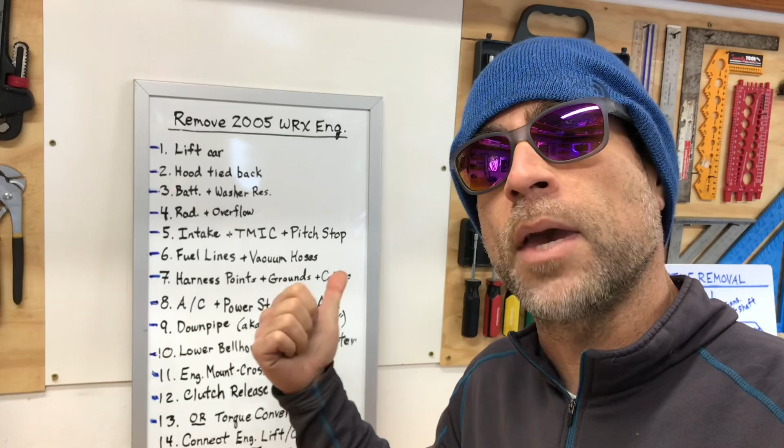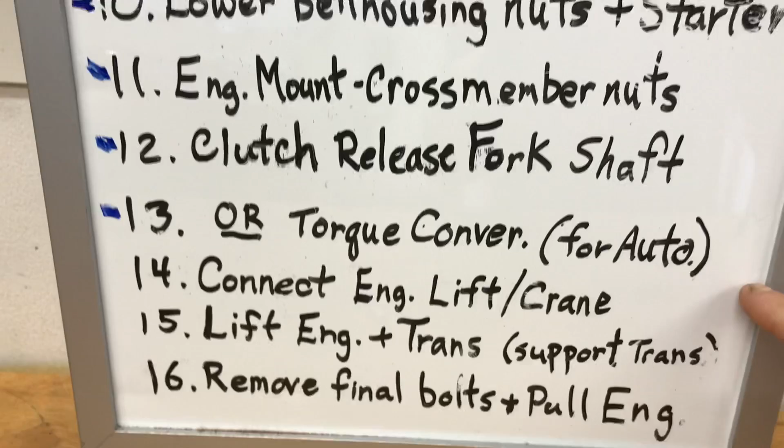This video is actually part of a build series where I'm removing a 2005 WRX engine and tranny from my 1998 two-door coupe. This whiteboard behind me has the 16 steps that I've been going through as I make these videos on this build series. Here's a close-up view of the list, and I put a hash mark by each step we've completed. As you can see, we've worked our way down the list, and we're all the way down here on the final steps. Step 14, 15, and 16: connecting the engine lift and crane, lifting the engine and transmission and supporting the transmission, and then remove the final bolt and remove the engine.

There's actually one bolt. I'll erase that right now. Let me get that erased, boom. And I'm gonna do all three of those steps in this video. So this video will actually be the last video in this build series where I'm removing this engine from that

1998 Impreza two-door coupe. And the steps that I've walked through in these videos where I'm removing this 2005 WRX engine will actually apply to virtually any Subaru engine that you're gonna remove from your Subaru. Doesn't matter if it's naturally aspirated or turbocharged, 4-cylinder or 6-cylinder. I'll bet that 95% of these steps will actually apply to you and your engine combination as well. So I hope you found this build series valuable, and check out some of those older videos if you want to see some of those earlier steps.

Okay, so let's head out to the car and let's take a look at the tools I'll be using to pull this engine. Alright, here's the engine hoist that I use. It's a Pittsburgh model. You basically can get it at any Harbor Freight store. I'll walk you guys through how I set it up.

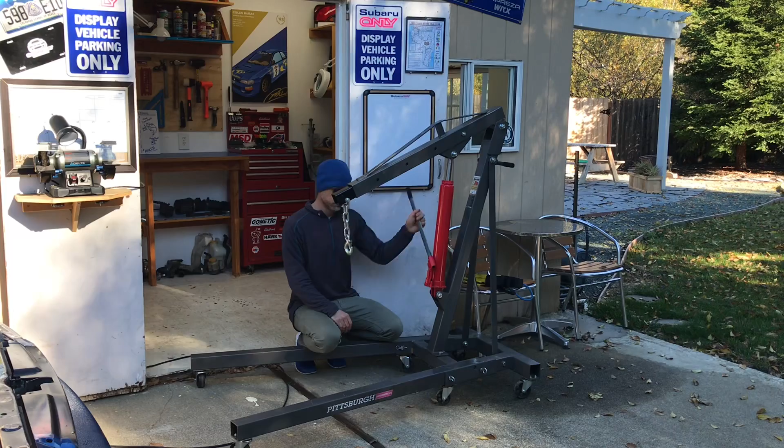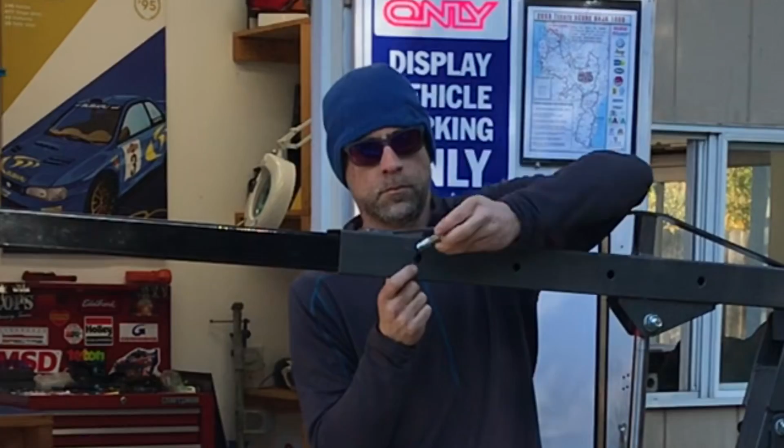It definitely helped to get one of these engine leveling blocks. They have a little crank on one side. The way these suckers work is as you crank it, it actually moves that mounting point along that block. So definitely get yourself one of these leveling blocks. It makes it a hell of a lot easier to pull any engine.

I actually get 4 of these suckers to connect my chains to that leveling block. These little suckers are rated for 2,200 pounds each, and they have a little screwing lock mechanism that you can lock down so you make sure the sucker's not going to come off.

Okay, the next thing are the engine chains you're going to use. Most engine hoist chains that you get are going to come with these little right angle brackets. And these work great if you can connect directly to your engine block, or in some cases to your intake manifold. I've done both, and I'll walk you guys through that in a little bit more detail later in the video. But for now, I'm just going to walk you through how I connect them to my leveling block.

Now, in addition to these engine hoist chains, I actually use these heavy duty carabiners. These suckers are awesome. They're made of stainless steel. They have spring-loaded little latches right there, and they're rated for 800 pounds each. So each one of these could lift an entire engine. And we actually use these guys to connect to our lift points on the engine.

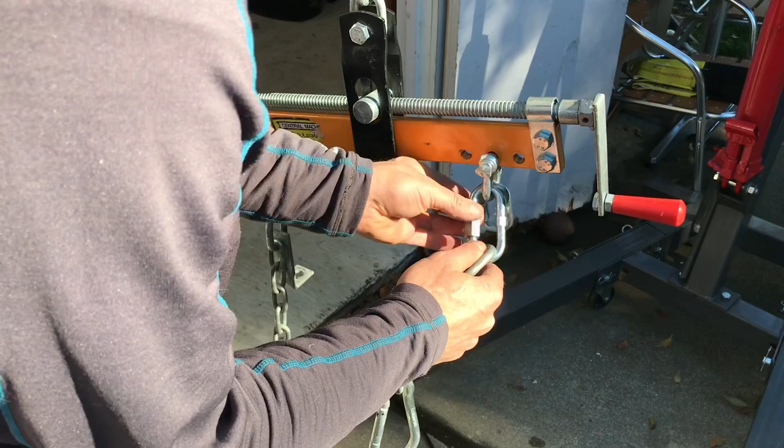So for now, I'll put these on the chain, and we'll throw these suckers on the leveling block on the engine hoist until we're ready to connect it to the engine. Then you can go ahead and screw that sucker down and lock it in place. You can see how quick and easy it's going to be to connect this to the engine once we're all set up. Okay guys, that's my whole engine hoist setup. It's a quick and easy setup.

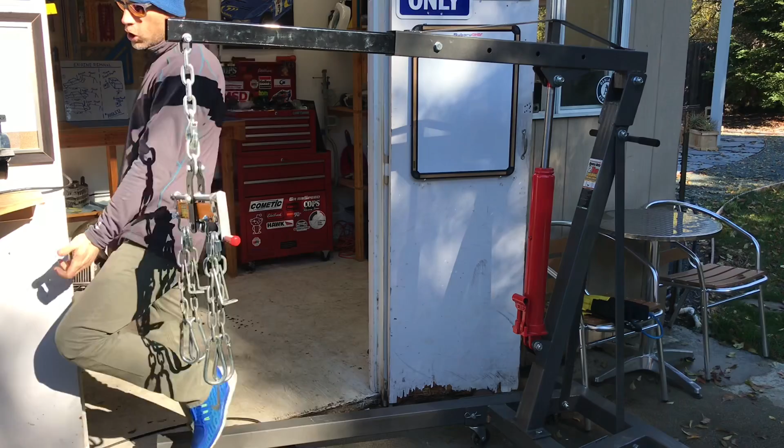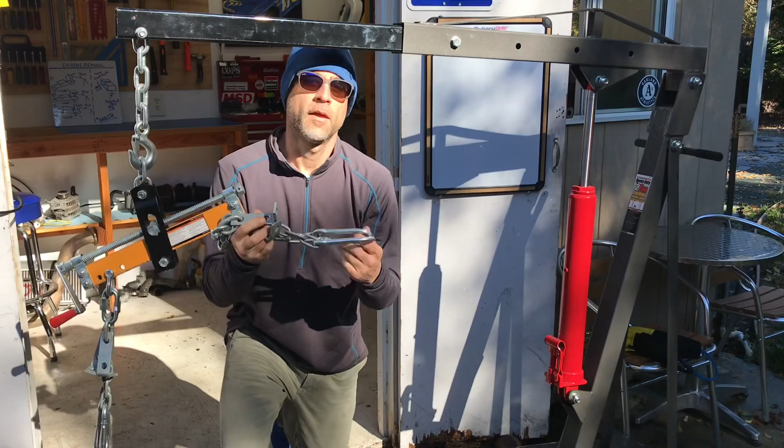Okay, so that's the whole engine hoist or engine crane setup. You got your hoist. Make sure you extend that top arm out to the furthest point. That makes it a lot easier. You got your leveling block. That definitely makes it a lot easier because you're gonna need to tilt that sucker a little bit as you're pulling the engine out. Then you got your chains, and of course I'm using these quick release heavy duty carabiners.

You can use any hardware to connect to that engine, but just make sure it's rated for the weight of these engines. These engines are typically in the 400 to 500 pound range. And if you're gonna pull your engine and your tranny, add a few hundred more pounds to that estimate. Okay, so let's move on to connecting this sucker to the engine.

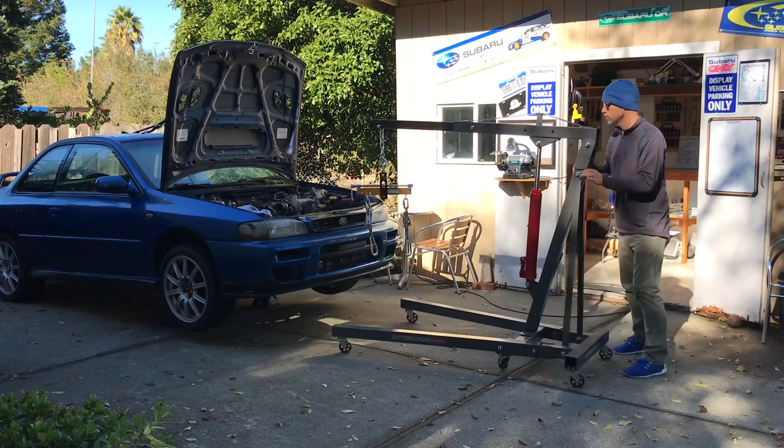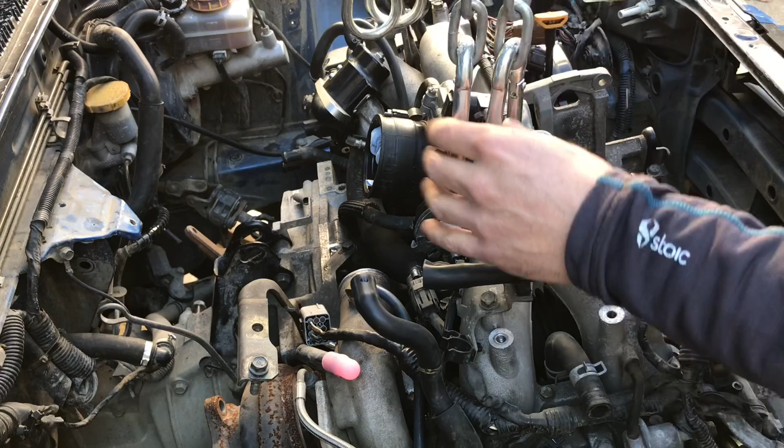Okay, we're over the engine bay, and we're getting ready to set this chain up. Now where are our engine mounting points? The two mounting points are this bracket in the back of the engine, right here, that bolts up right next to the bell housing. And the second mounting point is gonna be that AC compressor bracket. That's that heavy duty cast bracket, and it's got that hole right here that's gonna be perfect to lift this engine from.

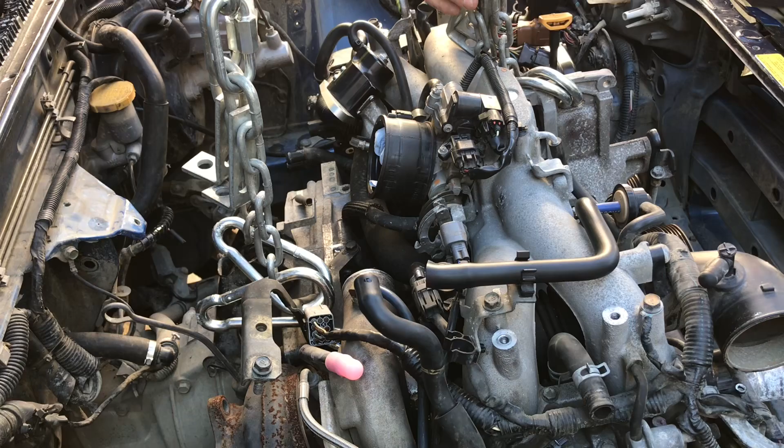Okay, that's our first 2 points connected to the front of the engine. Now we'll move on to the back of the engine. Now I'm going to go ahead and lift the hoist and take the slack out of those chains. And as I do that, I'm going to make sure everything's lined up correctly and not binding up, because it's pretty common and pretty easy for these things to bind up as they're starting to tighten up. Okay, now the chains are tight, and I can make any final adjustments before I start pulling this engine out.

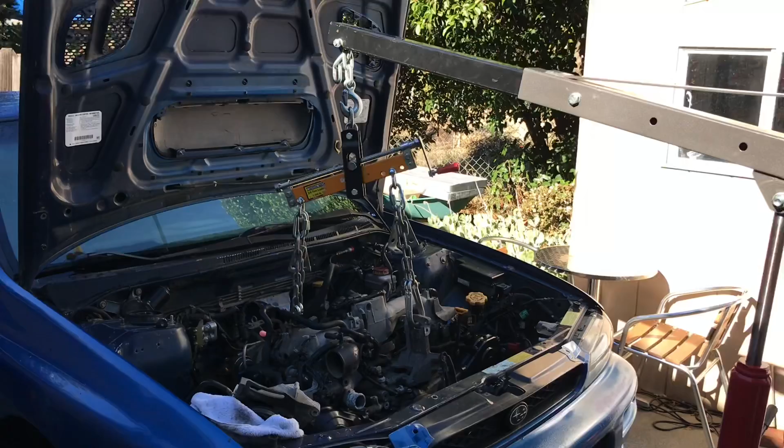Okay, as you can see, the chains are now hooked up. This hoist is completely hooked up to the engine, and we're ready to pull this sucker out. But before we go any further, I want to talk about the angles that this engine should be pulled out, because this engine is actually connected to that input shaft of your tranny.

And that tranny and that input shaft are aligned on a certain horizontal plane that you actually need to consider when you're pulling this engine out, because you actually need to slide the engine out off that input shaft, and you need to pull the engine up and out of those engine mount studs. You need to make sure both those things happen at the right angles so you can get this engine out. And I've actually put a little drawing on the whiteboard inside where I walk through that.

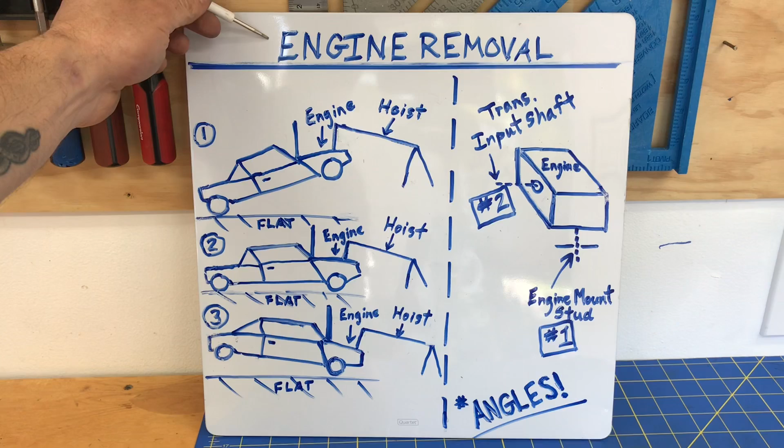Okay, here's a little drawing that I put up on the whiteboard for the engine removal process. And on the left here, you'll see I actually have 3 different scenarios: scenario 1, scenario 2, and scenario 3. In scenario 1, the front of the car is lifted up, but the rear of the car is sitting down. So the car is at an upward angle. In scenario 2, both the front tires and the rear tires are on the flat surface, so the car is sitting totally flat and horizontal.

And in scenario 3, the rear end of the car is actually lifted up more than the front of the car, so the car is actually lifted up but at a downward angle. And then in addition to all these cars that are lifted at these different angles, I actually have the hoist drawn over here to the right. And that hoist is actually going to have the same angle for all 3 scenarios.

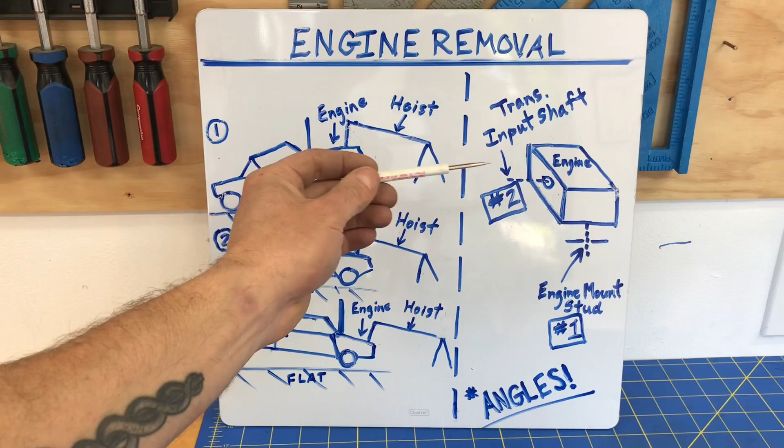And in addition to that hoist arm, you actually have the hoist chain, and that hoist chain and that arm will actually determine the angle that that hoist is going to pull that engine out. And like I mentioned earlier, the hoist arm angle and that chain and the angle that's going to pull the engine out actually won't change between scenario 1, 2, or 3. The only thing that does change is the angle that you have the car raised or lowered at.

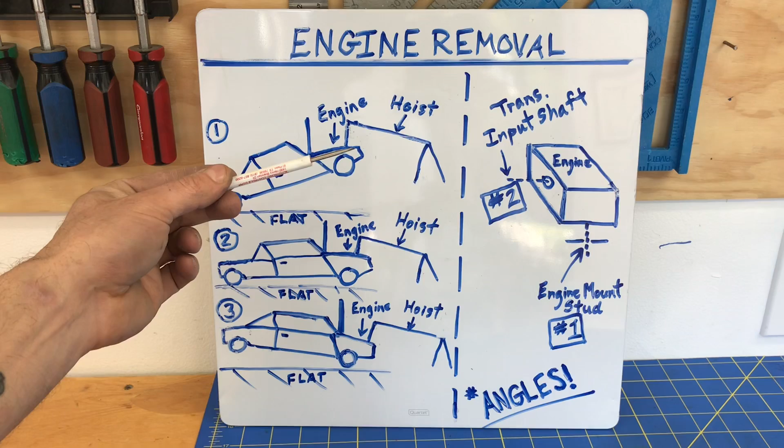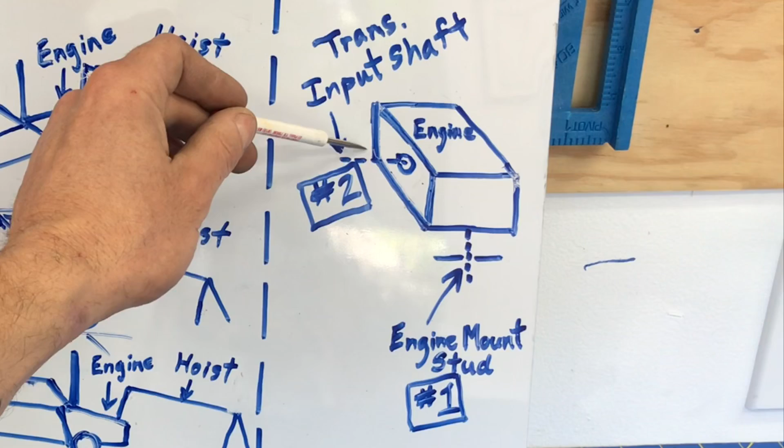You can make this whole process a lot easier if you consider what angle your car is lifted at when you connect this hoist and you start moving this engine. And the reason that's important is because of this drawing that I've shown over here on the right half of this whiteboard. Here, I'm showing the engine as a simplified block drawing, and I'm calling out the location for that transmission input shaft. And then down below, I'm also calling out the location for the engine mount studs. And I'm calling those 2 locations out because when we remove this engine, those are the 2 things that we're going to have to be thinking about.

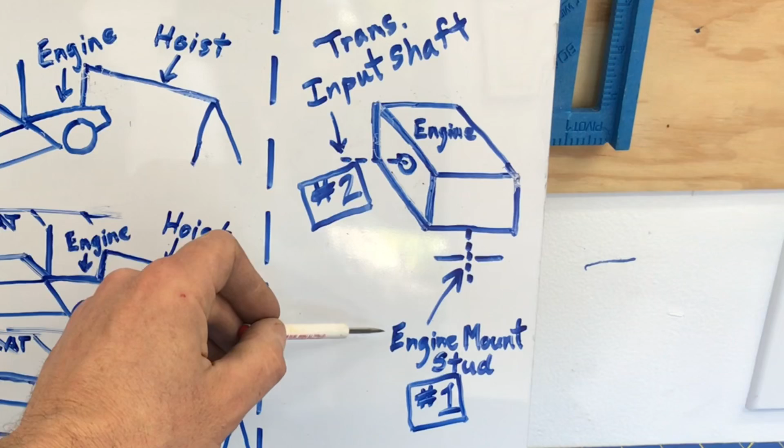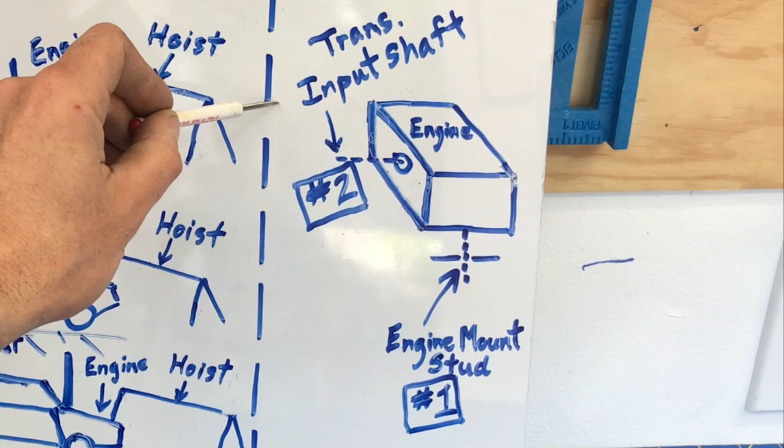We're going to have to lift the engine up so that those studs are free from the front cross member. And then, after the studs are clear, we're going to have to go ahead and slide that engine off of the transmission input shaft. And what I've underlined and starred here on the bottom is angles, because this process is all about the angles that we're working at.

And that's why I've drawn the cars over here in 3 different scenarios at different angles, because the angle that the car is sitting at is going to be a pretty good idea of the angle that that input shaft is sitting at. So in scenario 1, that input shaft will probably be sitting at an upward angle. In scenario 2, the input shaft will be sitting relatively flat, and in scenario 3, the input shaft will be sliding slightly downwards.

So I suggest anytime you're going to remove one of these engines, you set your car up with an angle in scenario 2 or scenario 3, because it makes it a hell of a lot easier to slide that engine off that input shaft and up and out of that car. So that's what I'm going to do. I'm going to set my car up closer to scenario 2 or 3.

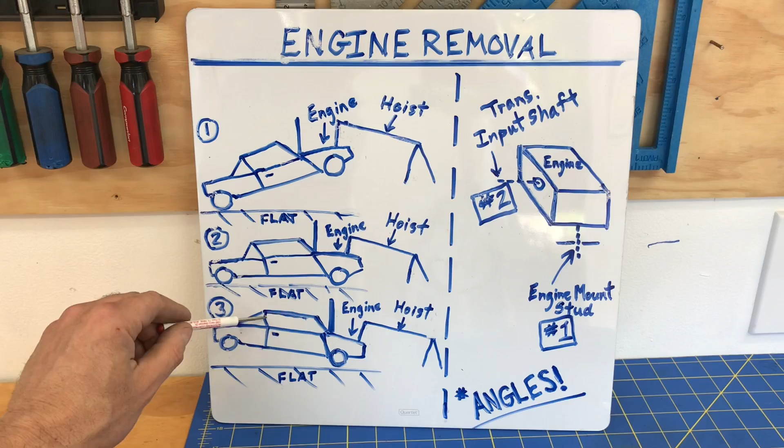Okay, we're all hooked up. The hoist is hooked up to the engine. The back of the car is jacked up, so the car is actually slanting slightly downwards on the nose side, which makes the angle for that input shaft that's going into the engine a little bit more favorable when we pull this engine out. As you can see, the back is actually jacked up higher than the front.

So we're ready to go ahead and lift this engine up, support the transmission, remove that last bolt, and then pull the engine out. Okay, let's go ahead and get this sucker done. So go ahead and jack this sucker up a little bit. Okay, I just checked and we've actually cleared that front cross member with those lower engine mount studs.

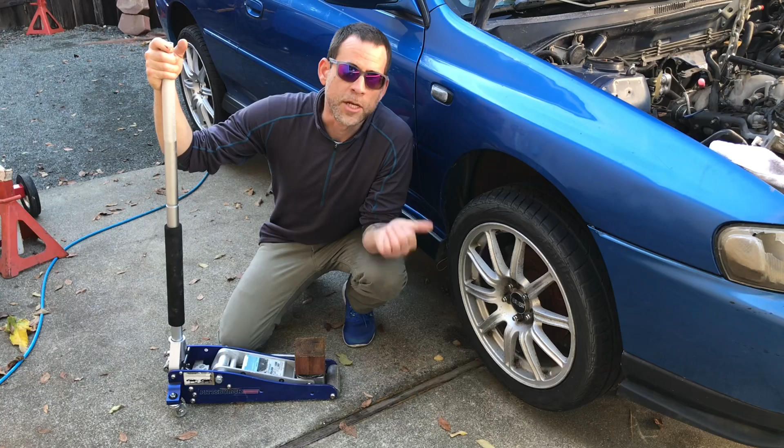So the next step to do is to actually support that transmission. That way we can remove that last bolt, we can pull that engine off of that transmission input shaft and pull it up and out of the engine bay. This sucker's good to go, so we can move on to the next step, remove that bolt, and then get this engine slid off that input shaft.

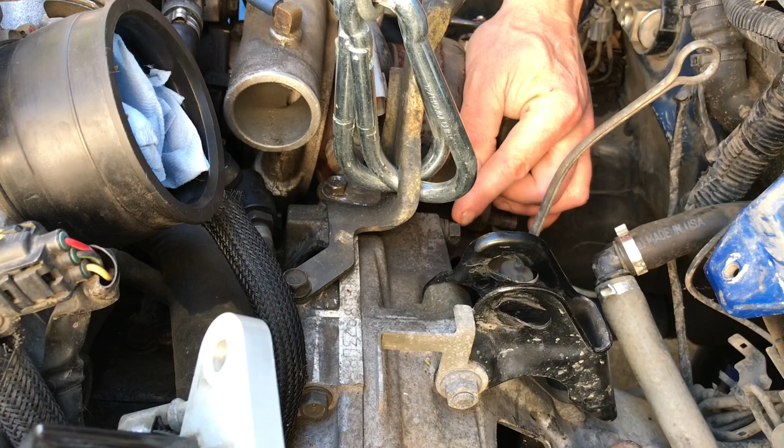Okay, here's that last bolt that we left in as a safety precaution. That way this engine and this tranny don't separate before we get it all up and ready to pull out. Now that the engine's lifted up, we've cleared those studs, and the transmission is supported from underneath, we can go ahead and remove this bolt. Okay, now this engine should be ready to be separated from this transmission.

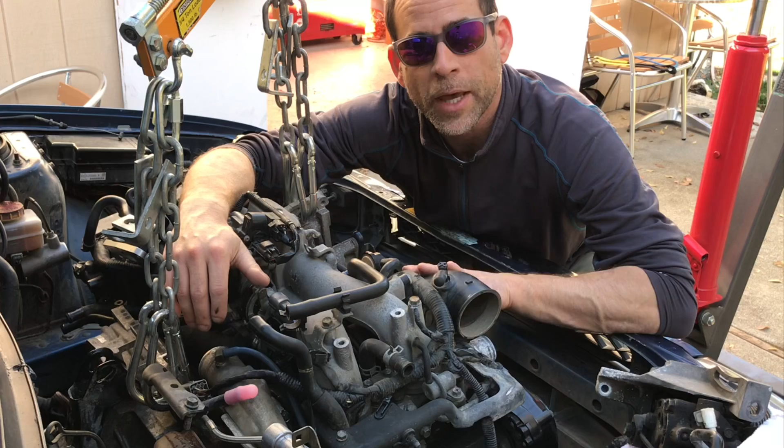I'm going to go ahead and lift it up slightly and try to separate it from that transmission surface. But I'm going to let you guys know, a lot of the times, the transmission bell housing surface and the rear of the engine get completely seized together because of road debris and salt and weathering that takes place back here. And when that's the case, these guys can be a real bitch to separate. But even when that happens, you can actually use a big screwdriver and hammer and get these suckers separated. So I'm going to go ahead and start to separate this engine, and we're going to see how hard it is.

Okay, this sucker is totally stuck, so I'm going to grab a big ass screwdriver and a sledgehammer. I'm going to show you guys where I'm going to hammer on this sucker to separate this engine and transmission, because wiggling it and jiggling it ain't doing shit. Big ass sledgehammer and a long ass screwdriver. That's the next two tools.

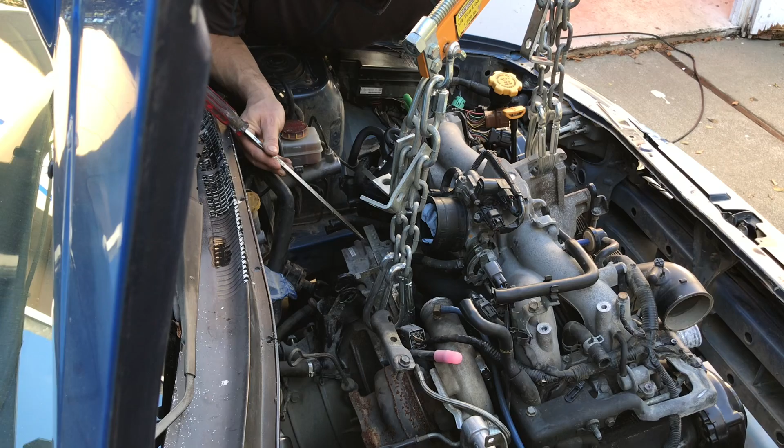This shit's getting real. Now the first thing you want to do is double check that you removed all the bolts and nuts from your transmission bell housing. Once you've double checked all that and you're sure you've removed everything, and if you have one of these clutch fork shafts, you definitely remove that fork shaft, go ahead and use this method.

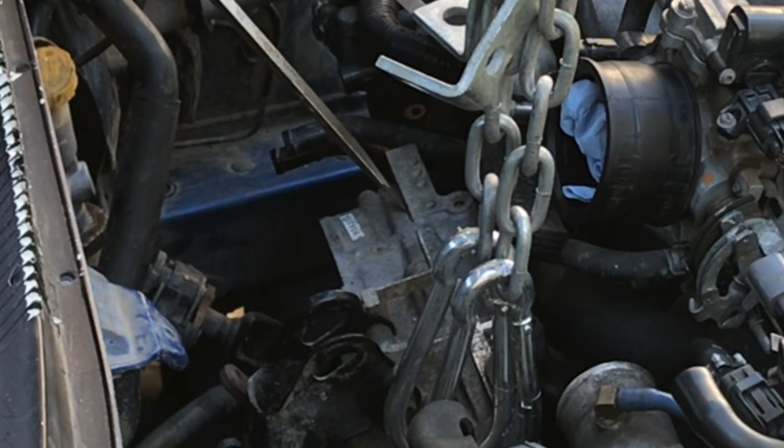Now where I'm hitting is right behind the starter location, right up against the engine and the transmission bell housing. Screwdriver and your sledgehammer, give it a few whacks. This should separate this sucker. Alright, I'm going to show you from this angle. Maybe you can see a little better.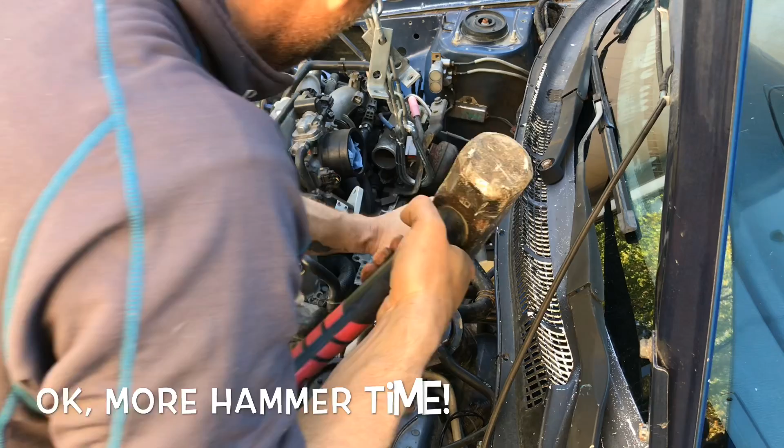Man, that sucker was seized on there. Once you see that crack developing, you can actually adjust the angle of the engine. That way you know it's aligned with the angle of the transmission, because you need to have the engine and the transmission aligned on that input shaft plane so you can slide it off that input shaft.

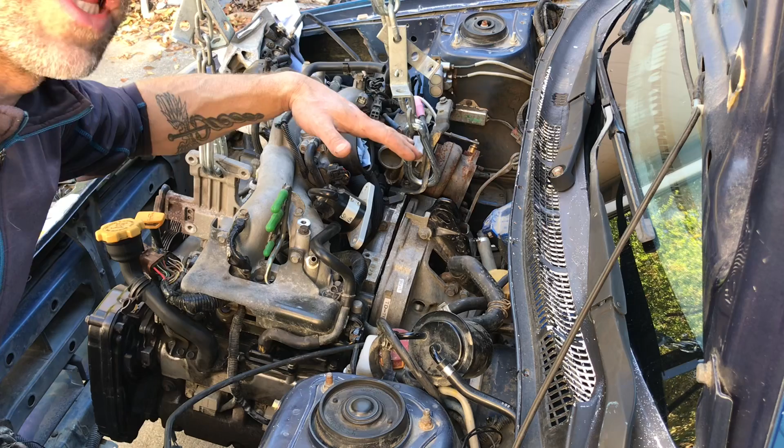Basically just keep bashing it with a hammer and that flat blade screwdriver right in between the mating surfaces, and then work it with your hands to try to work it loose and slide that sucker back. As you can see, I have a solid inch now, which means that engine is completely separated from that transmission. Bell housing dowels have completely slid out.

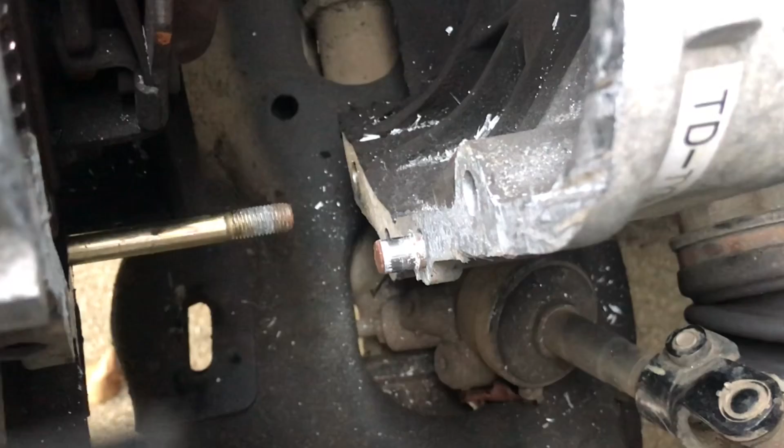Okay, there's a close-up view of those dowels and that lower engine stud. Those dowels are what get seized up in the engine block. I think those dowels were really corroded, and that's what was holding the sucker in. So as soon as you get those dowels out, then that engine should be able to slide out. So we're ready now to back this engine out and slowly lift it out of the engine bay.

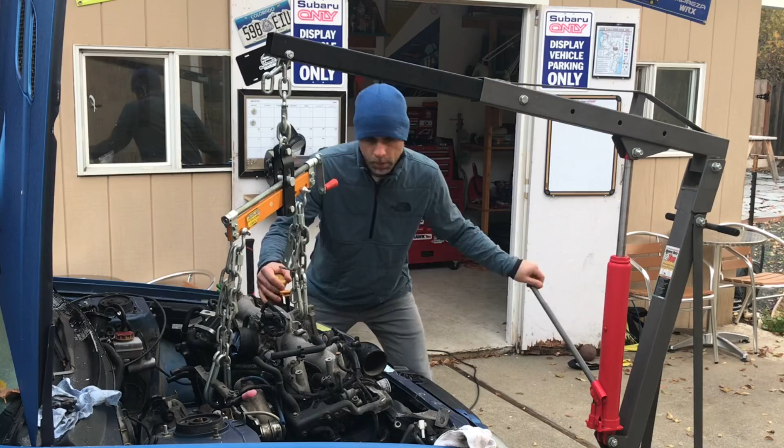Okay, now that the engine's free from that transmission, I'm going to slowly guide it out by cranking up on that hoist and slowly lifting this engine out so I don't crush anything on its way out of the engine bay. If you need to, you can adjust that engine hoist by pushing it forward just slightly like I'm doing right now. And then just keep an eye on all four corners and get that engine out of the bay. And slowly crank it up. Engine's out of the car, and we are ready to put the sucker on the engine stand.

I hope you guys enjoyed this video. I hope you enjoyed the build series where I've walked through every single step that you need to do when you get ready to pull an engine out of a Subaru vehicle. This engine is a dual overhead cam turbo motor, but all the steps that I walked through in this build series will apply to naturally aspirated motors, 4-cylinder motors, turbocharged motors, or 6-cylinder motors. Most of the steps will apply to any Subaru vehicle. So regardless of what your build is, take a look at these videos and you should be able to pull your engine, no problem.

Next step for me is going to be putting this sucker on the engine stand and then starting to pare it down so we can replace the head gaskets. That'll be a whole new build series I'm really excited to start, and I hope you guys will follow me while I go through that whole phase of the build.